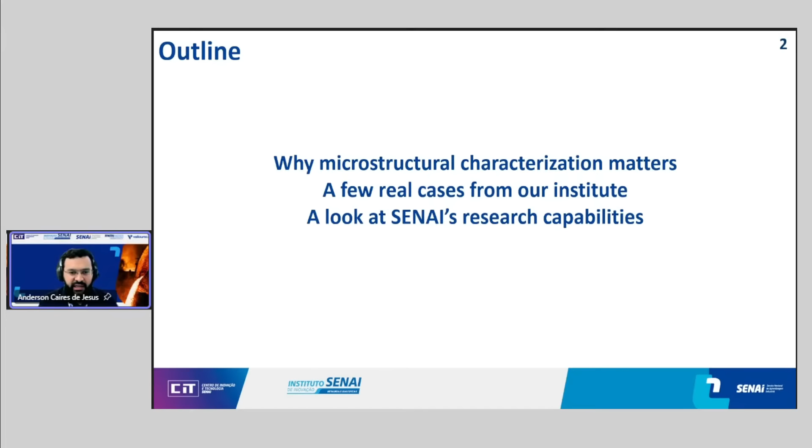In this talk, I will give you a quick roadmap about microstructural characterizations and why they matter for today's steel research. I think we need to understand the phenomena and correlations between microstructures, properties, and performance of metallic materials. I will share a few real cases and examples from our institute, as examples of applied research and how these characterization techniques can be used in real-world industrial challenges. Finally, I'll give you a look at the SENAI Institute of Innovation, Metallurgy, and Special Alloy research capabilities, just to get a sense of the kind of work we do and how we can help with your challenges.

So let's get started. I want to start with the basics. Steel is everywhere, in every aspect of modern human society. Global steel production data for 2024 is around 2 billion tons per year. That is a lot, more than any other material produced on this planet. It's in the buildings we work in, the cars and trains we travel in, the pipelines that carry energy across continents, in our homes, and the tools in our laboratories.

I think we need to understand what happens inside these materials at the micro level. This is really important for real-world applications. When you're talking about material produced and used at these magnitudes, every small improvement in how we understand and control the microstructure has a great influence on performance and great economic impact for society. Grain size control, phase distribution, inclusion content, precipitation behavior, all of these things are really important for applications for society.

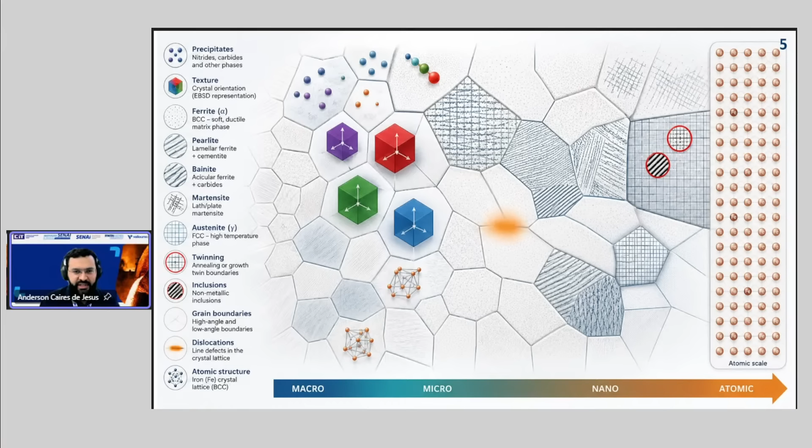It's really small, but the orientation relationships between these precipitates and the matrix have a great impact on mechanical properties. It's so interesting. At the finest, atomic level, we're talking about dislocations, defects in crystallography. It's such beautiful science behind a single piece of metal. So why did I want to show you these pictures today? The reason is actually very simple: steel is a really complex material.

We need a multi-scale picture of steel microstructure, from the micro level to the atomic level, together in a single map. At the macro scale, we look for grain structure and morphology, crystallographic textures, segregation bands, non-metallic inclusions, and deformed regions. We need to study this at the micro level too. Moving to more magnification, we get to the phase distributions: ferrite, pearlite, bainite, martensite, beautiful imaging using SEM, austenite, and the precipitations. All of these tell us about the material's processing history and possibilities for application.

And at the nano scale, variants, subgrains, dislocation cells, twins, deformations, it's a really complex picture. At the nano level we start resolving nanoprecipitates, like I said before. The coherence between precipitates and the matrix is so important, the interface between matrix and precipitates is important, and you need electron diffraction to explore this. These atomic scale features have a lot to say about material applications and possibilities.

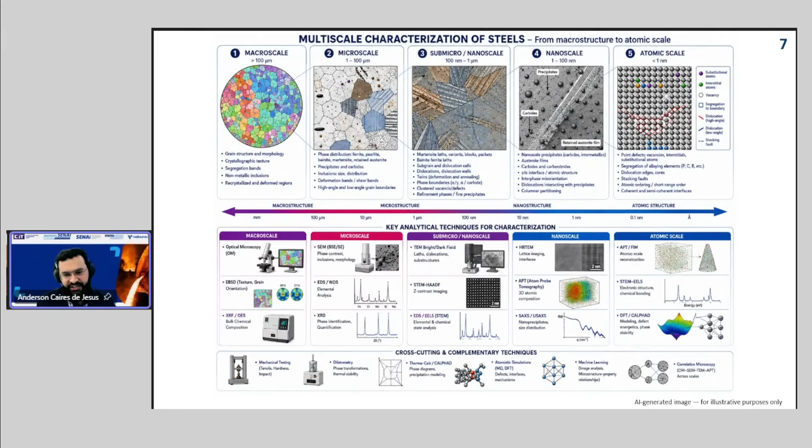These correlative techniques, combining all these methods, give us a full picture of the sample. This technology is used to create new applications or increase performance of materials in industry. Maybe just 0.5% or 1% improvement in material dimensions is so significant, it has economic impact for society.

This is a panorama of materials characterization these days, a lot of techniques. So this is not a talk about the specific technical aspects of each of these analytical techniques, but a more general approach to using these techniques to analyze materials.

Here in our institute, we have been working with our industrial partners and projects to understand the relationships between microstructure, properties of material, and performance. It's really interesting, not just creating new compositions of materials, but understanding the material properties.

First, we have an interesting work together with our colleague Daniel Matsubara for Gerdau Company, one of the largest steel makers in the world, in Brazil. The challenge here was understanding the influence of fine vanadium precipitates on the mechanical properties of steel for structural applications. This is a really interesting example, working in collaboration between the Daniel Matsubara team here at SENAI and Professor Victor Wolff at the Federal University of Minas Gerais, trying to understand why they observed different mechanical properties for these applications.

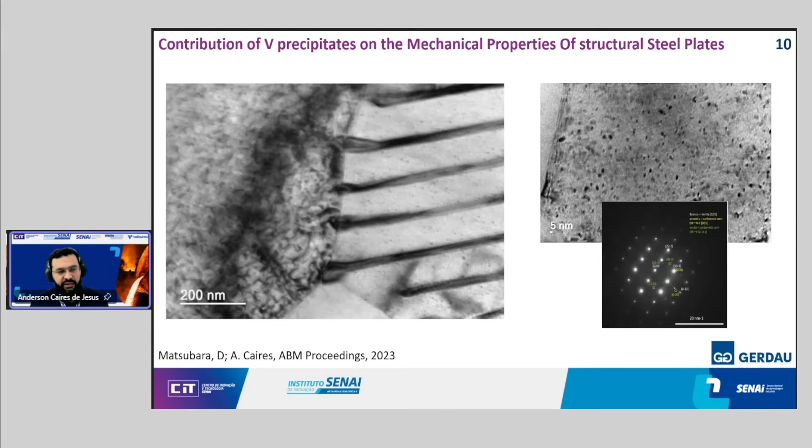The relationship between the matrix and precipitate interface was really important to understanding the differences observed in mechanical properties. We used electron diffraction to confirm these precipitates' interfaces follow the Baker-Nutting orientation relationships. This is just an example of a situation where you need to use more advanced transmission microscopy technology. This is very hard work to prove the orientation relationship between really small precipitates and the metal matrix, and it's really interesting for industrial application.

Another example of microstructural characterization playing a central role was our work with the company Vallourec, with my colleagues Roberto Maranhão, José Roberto, and Vicente Trindade, one of our speakers this morning. In this work, we used the Gleeble Thermomechanical Simulator to reproduce weld thermal cycles and compare the simulated sample against real weld samples. Again, a multi-technique characterization approach using optical and scanning electron microscopy, plus several different techniques for mechanical characterization of materials. Overall, the physical simulations reproduce the microstructures, and comparing to the real-world scenario gives us confidence in our simulations using the Gleeble machine.

And finally, I have a third example of papers and characterization work my team did at SENAI, and another institute here at SENAI working with industry to analyze microstructure. These are two papers presented with my colleague Ricardo Nolasco in 2014 at ICE Steel in China. This is a project between SENAI and CBMM, a company producing niobium here in Minas Gerais - maybe the largest niobium producer in the world - to explore the challenge of microstructural control in seamless pipe production.

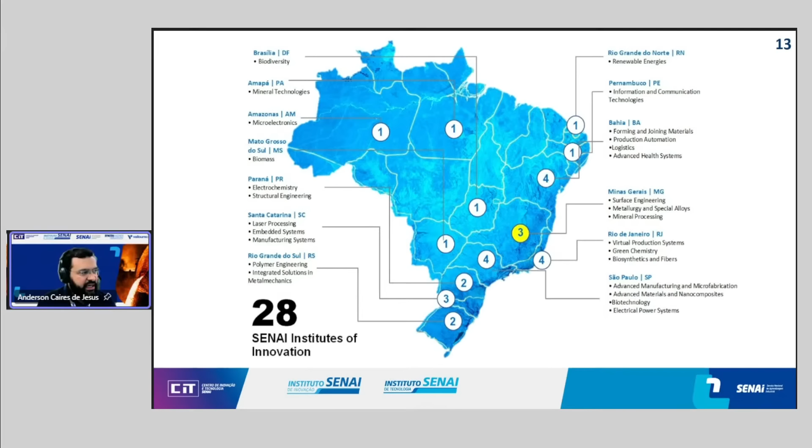But across Brazil, we have a lot of other institutes - advanced manufacturing in São Paulo, for example, and nanocomposites and polymers elsewhere. We have many different areas of expertise distributed across Brazilian territory.

Here at Minas Gerais, we have our Innovation Technology Center - a big campus in the city of Belo Horizonte. We now have two campuses: our campus here in Belo Horizonte and another campus in the city of Lagoa Santa, near here in Minas Gerais, where we explore rare earth technology. Our campus now has 3 institutes of innovation technology for SENAI, with more than 100 employees dedicated to industrial research.

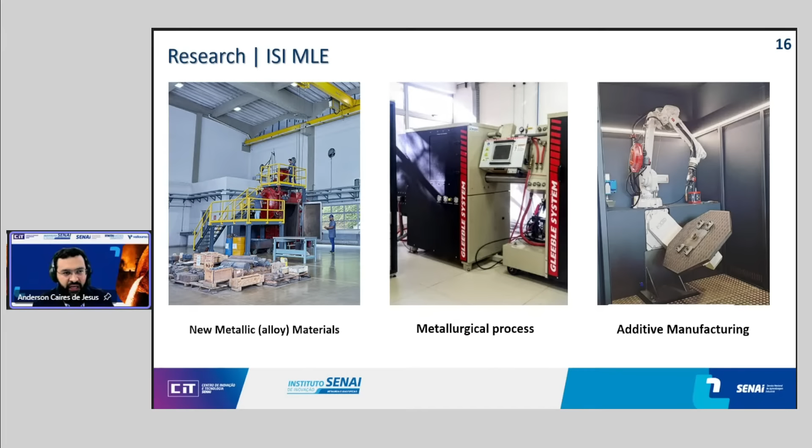This is our core of expertise here at the SENAI Institute of Innovation in Metallurgy and Special Alloys. We have top award-winning research facilities, for example alloy design, where we use computational simulations to understand material properties and design new alloys, both ferrous and non-ferrous alloys.

We have a laboratory for alloy melting and remelting using VIM furnace and remelting using VAR furnace, and here in our campus a pilot plant for 100 kilogram ingots. And of course, we have complete microstructural characterizations.

It's a world-wide metallographic laboratory here, and we also have electron microscopy, scanning and transmission electron microscopy, and a team for metallurgical process and heat treatment, mechanical testing, and so on.

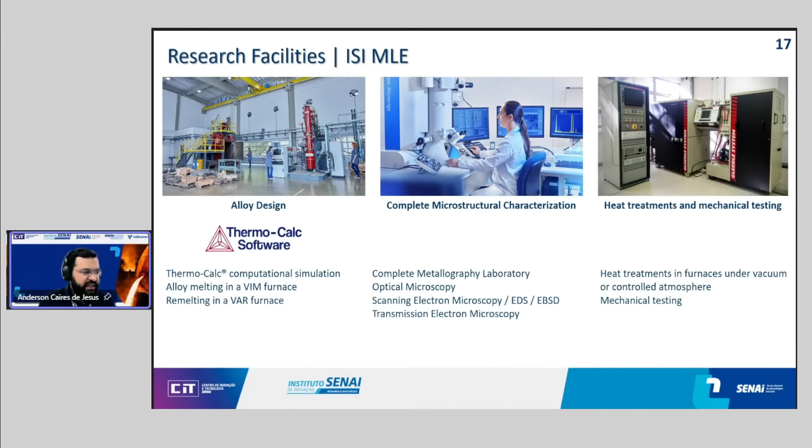The big team here in the city focuses on metallurgy and special alloys. We support industry using R&D grants through several national and international possibilities to help industry with their challenging everyday needs.

In general, I would like to invite everyone to know a little bit more about our institute and our possibilities to help industry with everyday challenges.

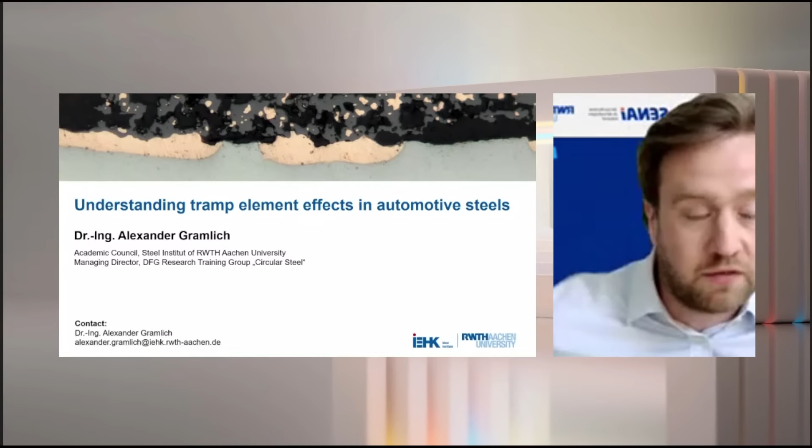As you can see, I have a double affiliation at the moment—I'm also the managing director of a new DFG research training group which we started this year, and I will give you more information on that at the end of my talk. So I will outline what alloying and tramp elements in steels are, their origin, and how they influence, on a schematic level, our metallurgical processes.

And then I'll give you a fundamental research example from our institute where we investigate copper impurities in industrial steels as well as in fundamental alloys to learn more about the precipitation behavior. Finally, I'll give you an overview of case studies, which we did mostly with student theses, where we investigated standard steels like DC01, S355, and also quench and tempering steel. All of these steels were alloyed with additional amounts of tramp elements to simulate future recycling steels, which we will produce more and more here in Europe.

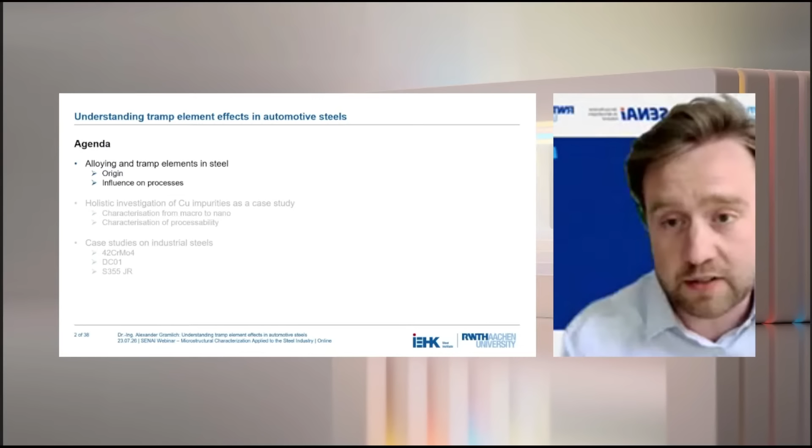So let's start with the first topic, alloying and tramp elements in steels. As you all know, our matrix in steel consists of iron and carbon, but those materials I would call nowadays mostly boring if there's nothing else inside. So we have our alloying elements like chromium, manganese, nickel, silicon, and molybdenum. Every one of these alloying elements is always added with a specific aim in mind to increase strength, ductility, whatsoever. Besides these wanted elements, we also have impurities, either from processing or from raw materials.

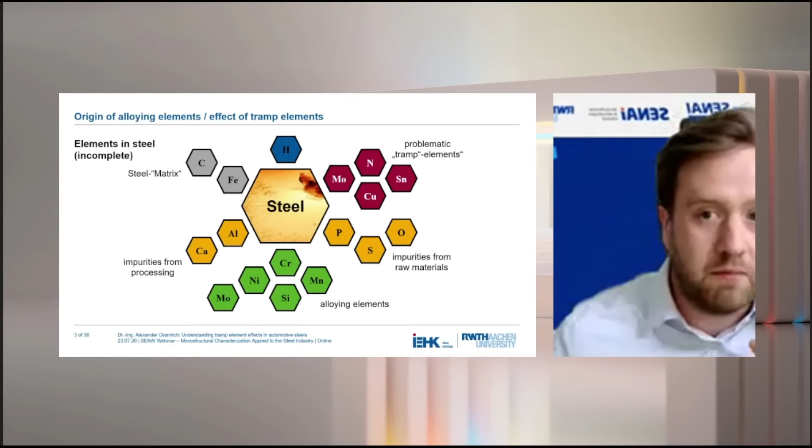Also, we always have a certain amount of hydrogen in our steels, but most problematic are the so-called tramp elements. The group I'm showing here, like copper, molybdenum, and so on, they are more problematic than the impurities from raw materials because it's really difficult to extract them from your liquid melt. So if they are once in your steel cycle, with every recycling step, you will enrich it and get more and more copper, for example. Over time, these copper additions can be really significant and will more or less destroy your steel concept.

What's their origin? When we are talking about primary steel production, we have calcium, aluminium, phosphor, and sulfur, which come from raw materials, for example. They can be removed relatively easily by metallurgical approaches. When we are then going to future steel production, for example mixing DRI with a lot of scrap in an electric arc furnace, we will introduce tramp elements like copper or molybdenum, which are enriched in post-consumer scrap in our melt, and they cannot be removed very easily.

There are some methods to extract, for example, copper. Vacuum distillation can remove a lot of the copper from the melt. However, all of these technologies which are available to reduce these tramp elements are very expensive, and you basically lose your business case for steel production if you would use this for standard steels for construction, for example.

Additionally, we are talking also about nitrogen nowadays in Europe, because a lot of steel concepts, especially for automotive industry, like bake hardening steels or interstitial free steels, are very dependent on having high cleanliness and also low interstitials. When we are now moving from a blast furnace-based steel production to an electric arc furnace-based steel production, these nitrogen levels are also increased and processes need to be adjusted more or less.

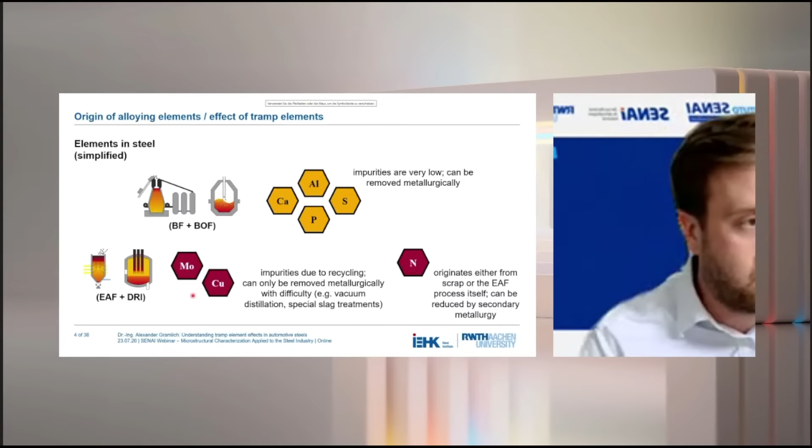When we are now thinking, okay, we have different steels, or similar steels, but with different concentrations of tramp elements on a schematic level, what would that change? We can summarize that copper, tin, nickel, chromium, molybdenum, and sulfur all reduce hot formability and cold formability, and would increase strength slightly, mostly via solid solution hardening, while toughness would be reduced. They originate from different scraps which are introduced into the general steel scrap.

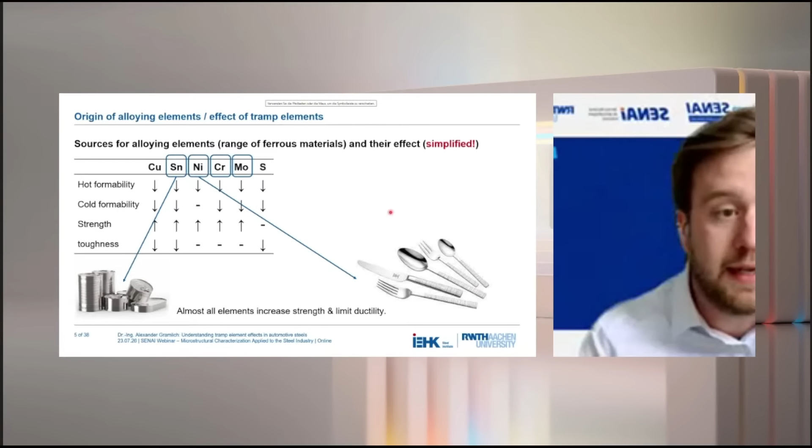I gave some examples here, as you can see, especially when we are talking about bearings or high alloy tool steels, it becomes pretty clear why we're also having chromium and molybdenum in our steel scrap. So in summary, most of these tramp elements will, to some extent, increase the strength and limit the ductility. With this, we could work to some extent. However, this is not everything which is covered by the tramp elements, and we will, especially in the case of copper, see the biggest problem in the upcoming minutes.

I already showed you an overview of the alloying elements in steels. I gave a small note at the top that this was, of course, incomplete, but I want to also give you another example, which is a bit less incomplete, because we also have microalloying elements: titanium, niobium, and vanadium, also nicely introduced by Anderson in the previous talk. What they can do is grain refinement and other very interesting things in more advanced steels. Also, boron is alloyed, for example, in press hardening steels for automotive. All of these alloying elements are very dependent on the nitrogen concentration because they have a high affinity to nitrogen.

And when we are moving in Europe to electric arc furnace-based steel production, all of the alloying concepts which are currently produced by the blast furnace, they need to be reassessed if they can be moved to the electric arc furnace. Okay, so far, a small introduction to the tramp elements in general, where they come from.

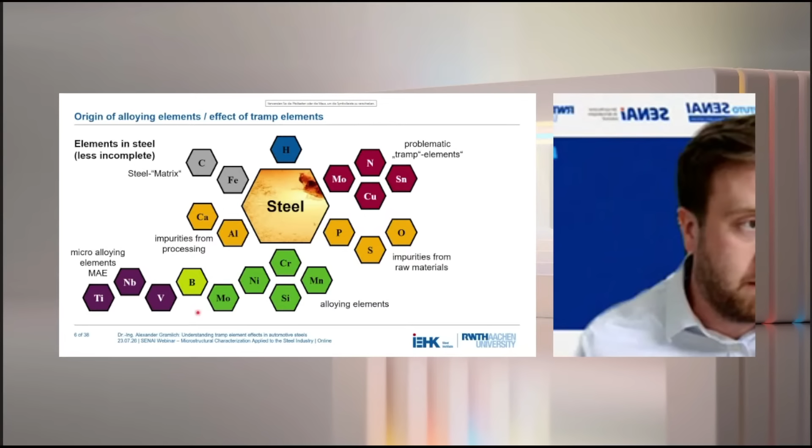And this is independent if it's a phase which is forming like austenite or ferrite or a precipitate. What is most important, and I will give you some examples later, is that all the impurities we just discussed interact basically with these phase transformation kinetics. This is what we need to consider, because these are the effects which go beyond only increasing strength or ductility.

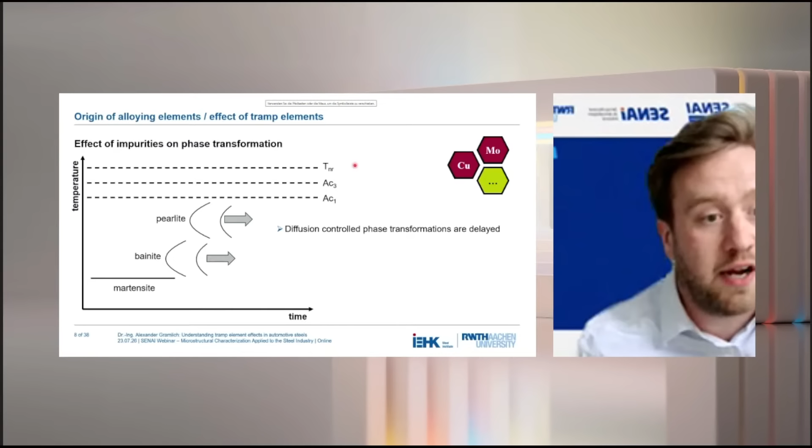So for example, our tramp elements, they will move the pearlite and the bainite field to the right, as all of these diffusion controlled phase transformations are usually delayed. We will have, in most cases, a reduction of the martensite start temperature, and also our temperature for no recrystallization is increased. And finally, AC1 and AC3 change in dependency of the tramp elements.

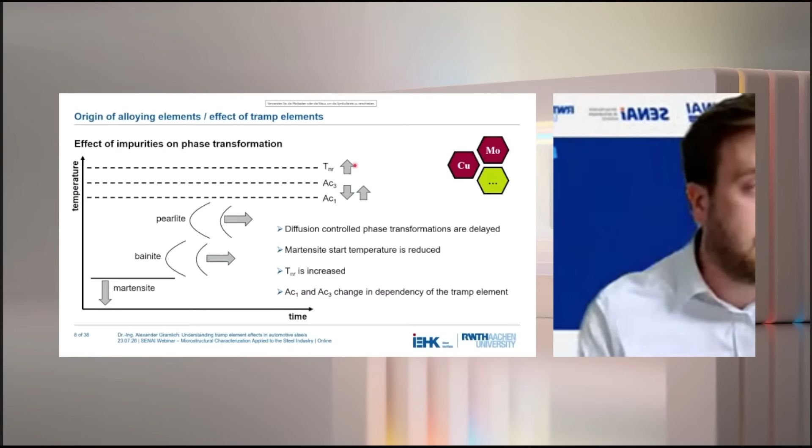Why is this important? Because these diagrams are used to design every heat treatment process in the industry. And when we are looking now, based on these changes, for example, on a typical quench and tempering process, here also schematically shown, we have influences on the austenitization temperature as A1, A3 are modified.

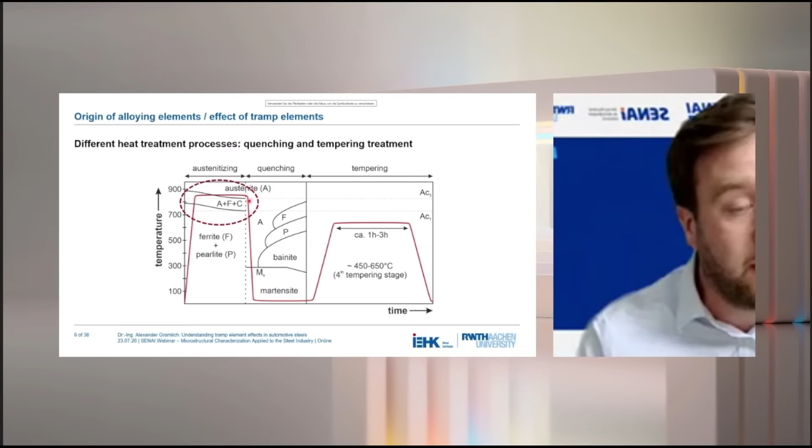We will have an influence on how fast we have to quench to achieve fully martensitic microstructure, because all of these phase fields are modified by the tramp elements. And finally, we will also see an effect on the results we get after tempering, as carbide growth, for example, is also influenced by tramp elements.

This is for classic quench and tempering steels, maybe a forging product, but also when we are talking about thermomechanical rolled products, we have to assess the effect of tramp elements. I already said that we will have an effect on the no recrystallization temperature, on the AR3 and AR1 temperature, and also our microalloying concept needs to be assessed, as we might have an interaction with nitrogen here.

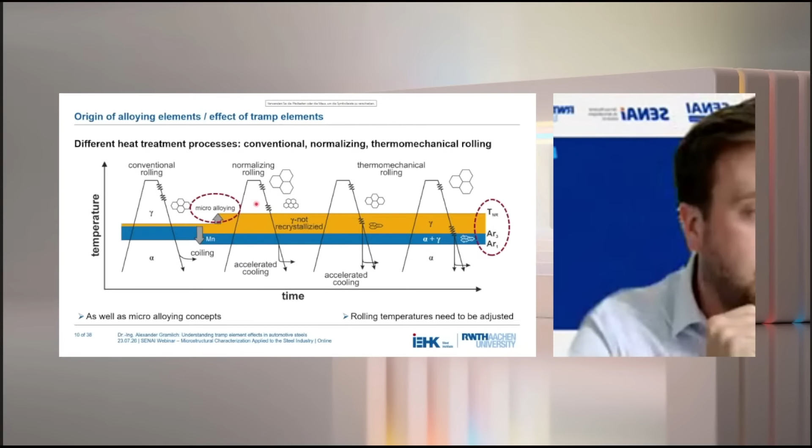So basically, if your company is doing hot rolling, different types of it, normalized rolling, thermomechanical rolling, whatsoever, if tramp element concentrations are growing, this needs to be considered and investigated, and how your processes need to be adjusted.

From this fundamental basis, I would now like to dive deeply into one topic, which is the effect of copper. And this is maybe the most prominent example, of course. It has been researched in the past quite extensively, but it gets more and more important because due to the electrification of the transport sector, more and more copper is entering the scrap cycle.

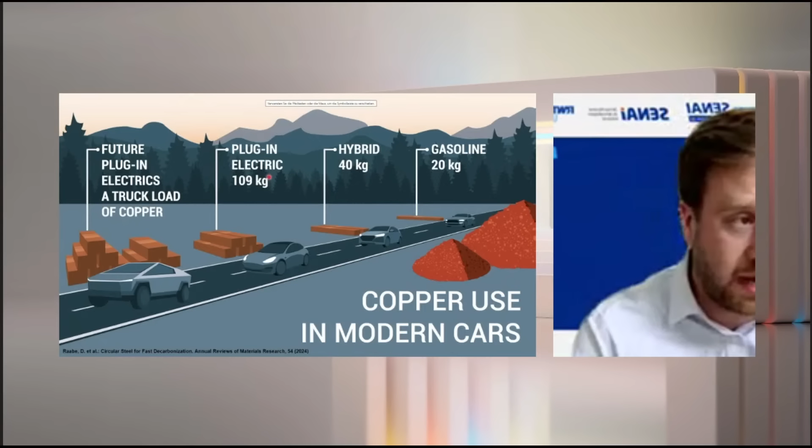So if you're looking on a standard gasoline car in the past, it had maybe around 20 kilograms of copper. When you now have a modern plug-in electric, it can have over 100 kilograms of copper. And just to give you an idea where all the copper sits, it's not only the motor for moving the car forward, also every quality of living improvement, for example electric windows, they all contain small motors which contain copper. So all of this adds up in the end to a lot of copper which is introduced into our steel material flow.

So we have to deal with it and also investigate what the copper is doing in the first place. As a material engineer, I really like copper because you can do a lot with it. You can improve strength, toughness, hardness. It influences transformation behavior. You get oxidation resistance and corrosion resistance, dependent on the concentration. And most interestingly, there are a lot of studies in China: if you introduce quite an extensive amount of copper, you can even get antibacterial properties.

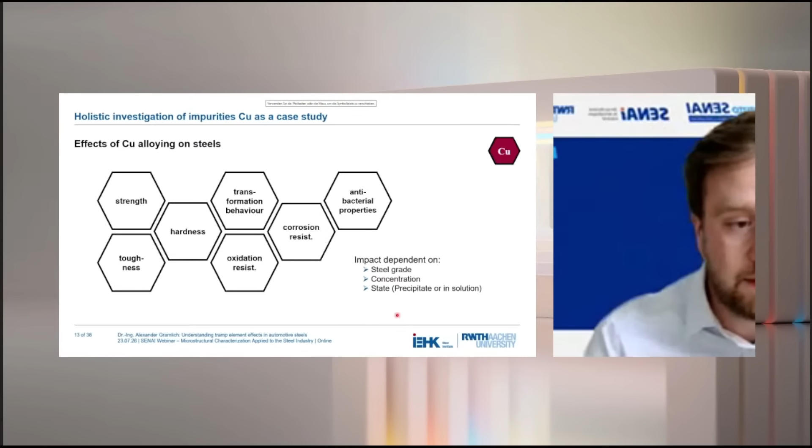So from this overview, you could say maybe copper introduced into the steel is not a bad thing. However, there's a big problem, which I will explain later on. Always, the impact is dependent on the steel grade—which steel we are alloying with copper, the concentration of copper, and also the state.

As I already said, quite an extensive amount of research has been done in the past, and this is the current opinion in the literature of how the precipitation process goes on. You start with a very high amount of iron still in your copper precipitate, with a coherent BCC precipitate, which over time develops through two semi-coherent intermediate states into the FCC thermodynamically stable incoherent copper precipitate. As indicated by the crystallographic strain, the FCC one has basically not much influence, and the BCC one is the most interesting one from a mechanical engineering perspective.

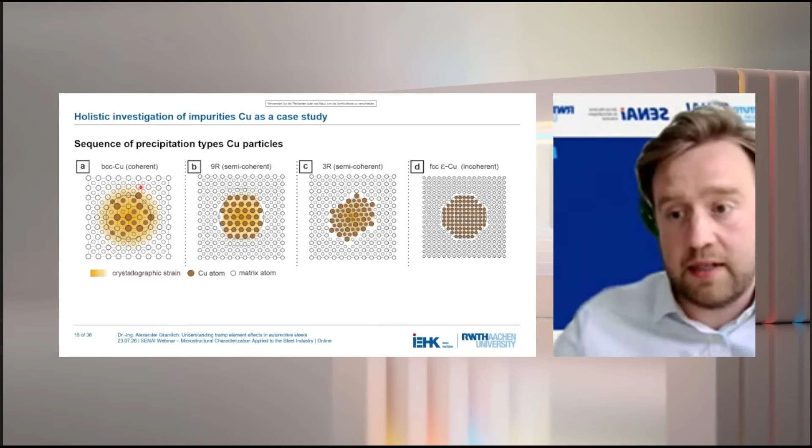This is only schematic, but as Anderson also nicely pointed out, we nowadays have possibilities to investigate copper at atomic resolution, and this is what we did in the past. Here you can see an atom probe tomography result. Basically, all these small orange dots are single copper atoms, and with these larger orange balls, we try to visualize copper precipitates.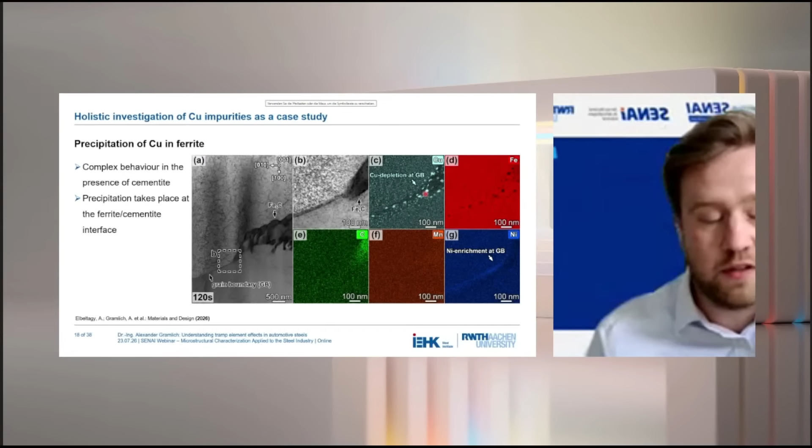So you could argue, how do these precipitates really form? Basically, you can only learn this from in situ observation, and this is what we are working on at the moment. For this, we went to a synchrotron source for X-rays, and did dilatometric investigations of our copper alloyed steels, measuring the crystallography in situ.

With these results, we could prove that in ferritic steels, you also have, in some cases, direct precipitation of this FCC copper. So we are somewhat challenging what is currently the state of the art. But this is very important, as all of our modeling approaches need this data to come up with predictions of how the copper precipitates are growing in your industrial steels.

Finally, we could also demonstrate this again with atom probe tomography. We did an investigation after 120 seconds ex situ and after 30000 seconds. What you can nicely see is that you have a coarsening of the precipitates depending on your heat treatment time.

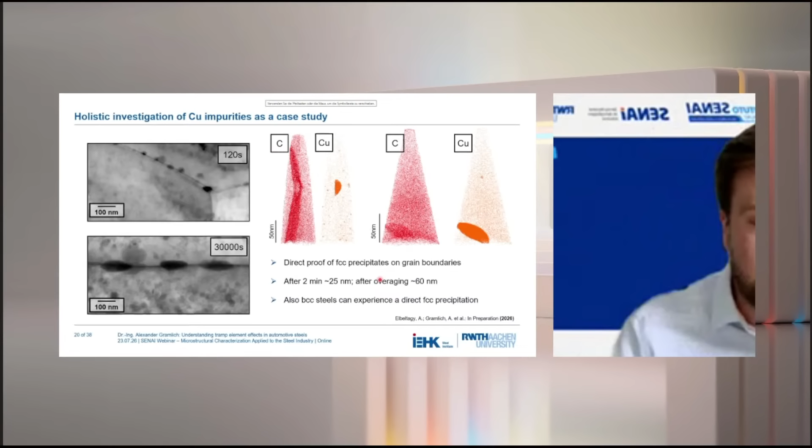From this we learn there are a lot of precipitates. It's a bit tricky to model them, it's a bit tricky to measure them. However, we can use them for strengthening.

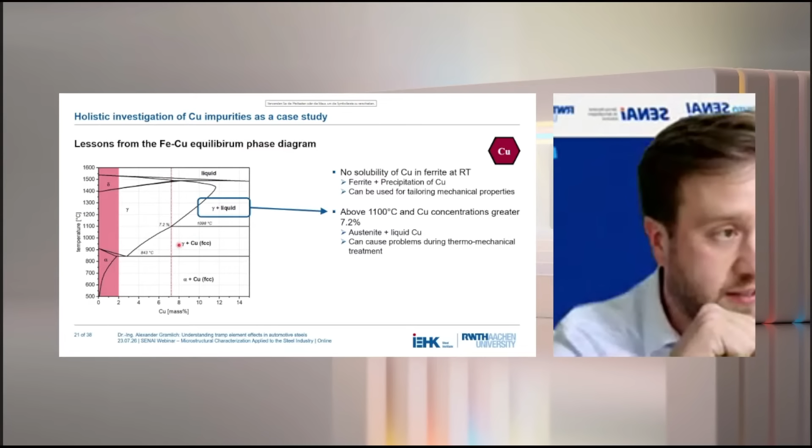However, you might ask, okay, this happens only if you are above 7.2%. Why is this an issue? How will the copper not concentrate up in the steel scrap? This is true on the one hand. However, this is not simply a problem of soluted copper in the matrix. The reason is that copper-induced hot shortness, the hot fracture of steel slabs, is a combined process of liquid metal embrittlement and selective oxidation.

You start with an initial state where your copper is homogeneously distributed throughout the matrix. Then your scale layer will form, your oxide, and your copper is not soluble in the oxide. So your copper will enrich between the oxide and the matrix to such an extent that it will form more or less pure metallic copper. And when you then put stress on it, basically your copper can penetrate the grain boundaries very easily.

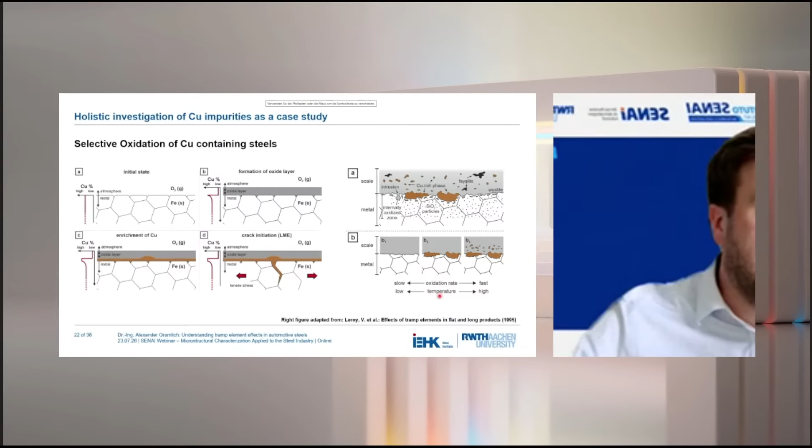This can be influenced, of course, either by working with other scale-influencing elements like silicon, for example, or by working on process parameters like the oxidation rate or the temperature. By this you can push the copper a bit into the scale layer. However, it's still an issue which is not completely understood. Some ways exist for working around it, but these ways are often defined only for a single steel, and the mechanism behind it is still under investigation.

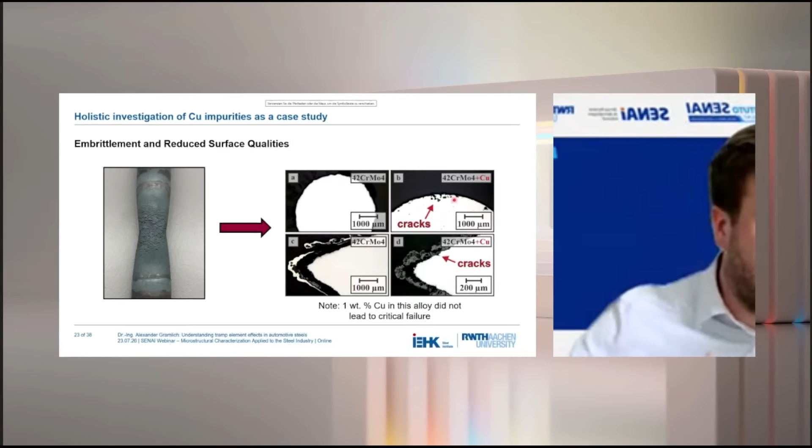Just to give you an example how this would look: in a steel sample, we did an interrupted hot tensile test, and here you can see nicely how basically the full surface of the sample is covered with deep cracks. And when you look at microstructure images from the side, you can see that we have penetration of these cracks into the steel sample.

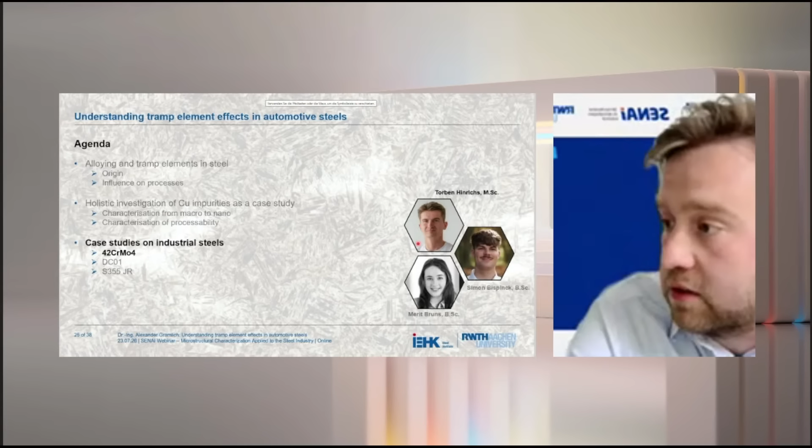Okay, so far to the more fundamental investigations. Now I would like to continue with some case studies on industrial steels, starting with the master thesis of one of my students, Mr. Hinrichs. He investigated the 42CrMo4 quench and tempering steel.

Similar to what the colleagues at SENAI are doing, we usually produce our own lab melts up to 80 kilograms. In this case, we varied the copper concentration and added 0.5% and 1% to it. We investigated phase transformation behavior, mechanical properties, and also the hot shortness susceptibility, but I will focus here mostly on the phase transformation behavior and the mechanical properties.

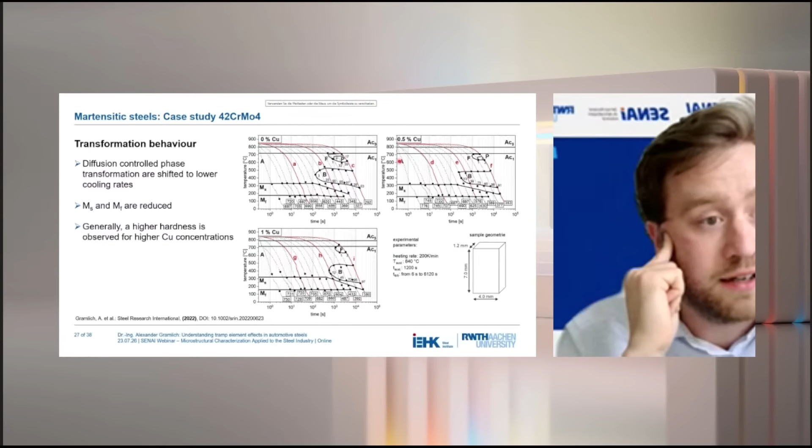For this we collected standard CCT diagrams. As you can see in this slide, we have the reference state and then the CCT diagrams for 0.5% and 1% copper. As you can see quite directly, but I'm adding a line here to make it even more visible, all of our diffusion-controlled phase transformations are moved to the right side. So bainite formation is now taking place at slower cooling rates, the same as ferrite, and we couldn't even find any pearlite formation anymore. So we see here that hardenability is increased through the 1% copper.

Additionally, we see that martensite start and martensite finish are reduced, and generally we see a higher hardness for higher copper concentrations.

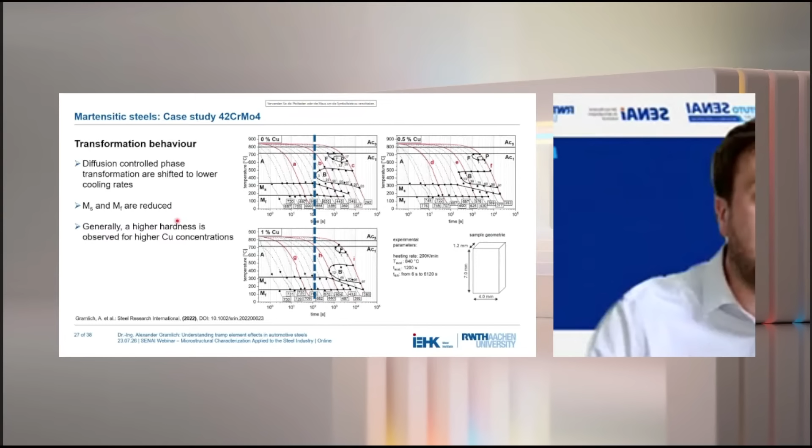However, for forging steels, this is not a bad thing, because when we increase the hardenability, theoretically we could also produce components with larger wall thicknesses from this steel and have a complete martensitic microstructure into the core, which might not have been possible without the copper. So in my opinion, this would be a positive effect.

When we are investigating the mechanical properties, we can see here in the full line the reference alloy, and in the dotted line the one with 1% copper. We have differences independent of the tempering temperature, however not critical. In general we always have the classic trade-off: higher hardness, lower ductility. Also the general tensile test curves are quite similar, and the same can more or less be said for Charpy tests.

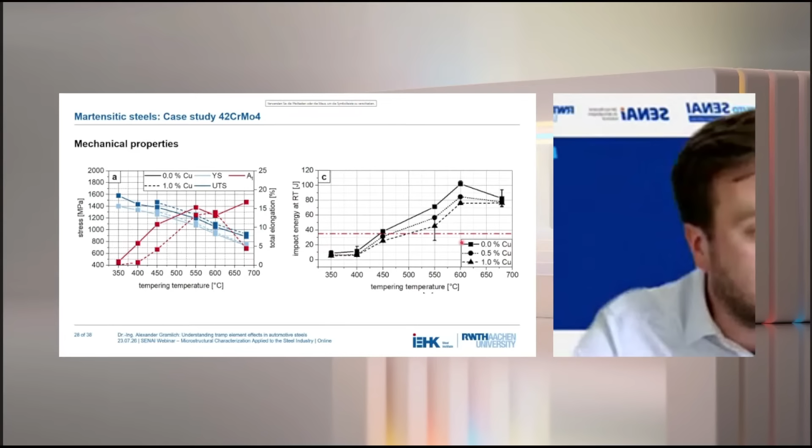We can see a general reduction in this case for the copper-alloyed one. However, we are still for most tempering temperatures above the industrial threshold, which was defined at 35 joules by our industrial partners. So from these results, I would conclude that even 1% of copper can be tolerated in a 42CrMo4 quench and tempering steel.

The last finding, and this connects really well back to the atom probe tomography, is the matrix increase which we found in hardness at a certain tempering temperature. As you can see here in blue, our copper-containing steel has around 70 Vickers higher hardness. However, this cannot be explained by solid solution hardening alone, as the solid solution hardening of copper is more or less around 10 to 20 Vickers in this concentration.

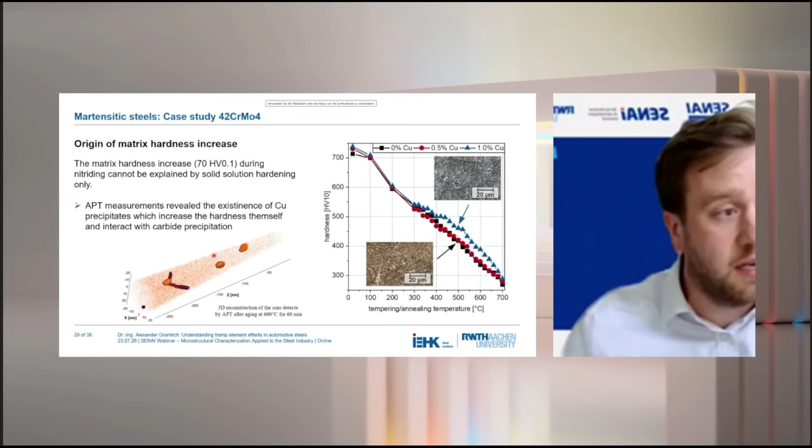But what we found when we looked into APT again is that the copper, here again in orange, connects up with cementite and other carbides. So the effect of copper is not only that it adds solid solution hardening, but it also interacts with the cementite and other carbides, and helps keep them smaller, which effectively increases the hardness more than solid solution hardening alone would. So you see a lot of interactions which have to be assessed, combined, to get the full picture.

Continuing now with ferritic steels. First we looked at the martensitic ones, and now we are looking into two bachelor theses where we investigated industrial-produced DC01 and S355. They were both produced by blast furnaces at the Salzgitter plant in Germany and artificially alloyed with tramp elements to mimic higher recycling fractions.

I will start with the tensile test of the S355. We had three different alloys: two variants of S355 with slightly different carbon and manganese concentrations, and our green steel somewhere in the middle. What I want to point out is not really strength and ductility, because this changes with the carbon and manganese concentrations, but what you can see is that we have a pronounced yielding in this steel. This is connected to higher nitrogen concentrations, which I pointed out at the beginning of the talk.

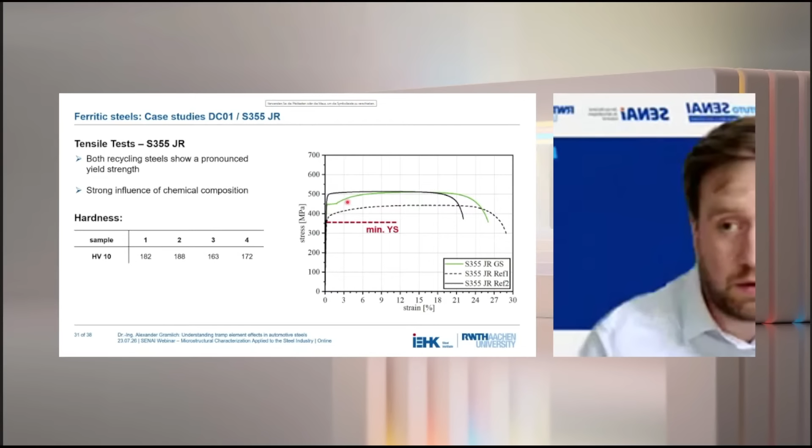Similar things were found for the DC01 and DD11 variants, the hot rolled and cold rolled states. Also here we could find pronounced yielding in the green steel, so this needs to be considered. Maybe not the properties themselves will be affected, but the deformation behavior on a more abstract level.

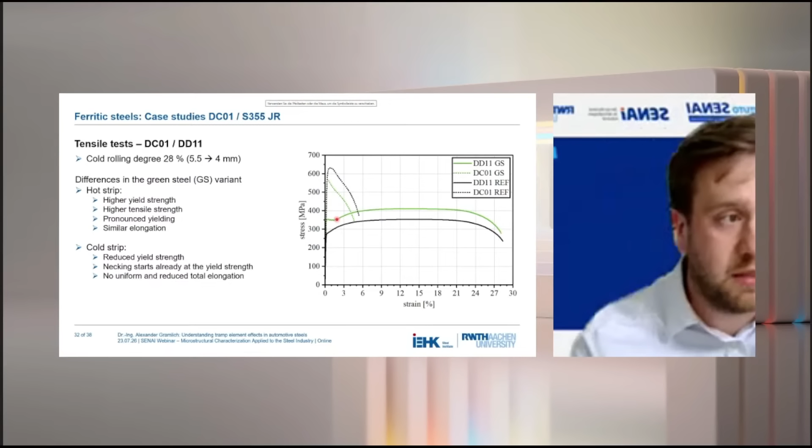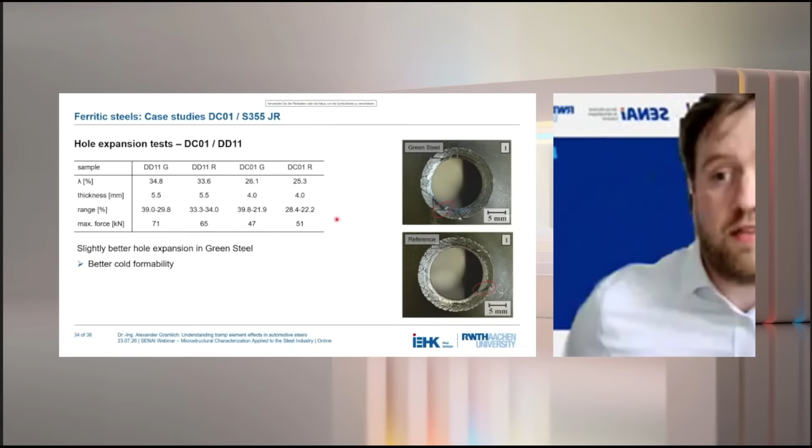However, when we looked at the deep drawing steel, we could see that here our hole expansion ratio was increased, even with the higher strength and the introduced tramp elements. The reason for this was connected basically to the microstructure.

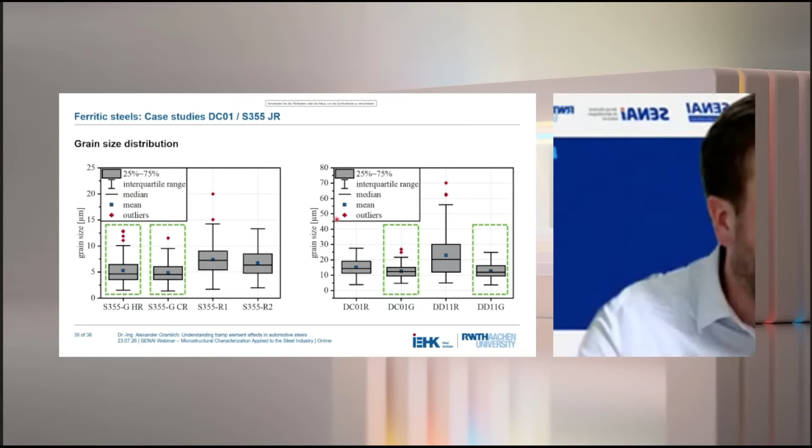We did a thorough investigation of the grain size distribution, and what we found for both steels is that the green steel variants had a much smaller grain size due to the solute drag effect of the tramp elements, which prevents the coarsening of the ferrite during batch annealing. This also fits very nicely back to the beginning of the talk.

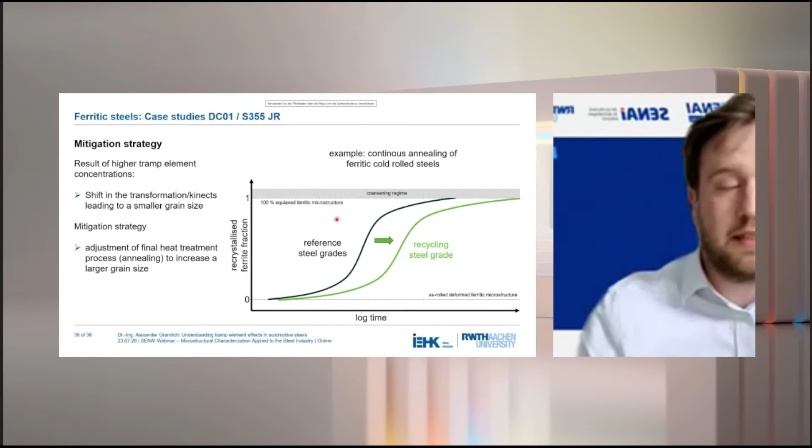Here you are seeing a more schematized drawing of the recrystallized ferrite fraction in our steel grades, and what is basically happening when we add tramp elements. So when we are looking at recycling steel grades, this recrystallization is shifted to longer times, and this can be assessed, and we can work against this by adapting process parameters, for example.

So to summarize basically on the case studies, in most cases, we can say that by adjusting the process parameters, for example heat treatments or rolling parameters, we can really work on adjusting our steel properties to achieve more or less the same as before. Of course, there are some major issues like hot shortness, but these can also be assessed, and we are pretty sure that we can adjust our steel products in the future to move toward a more sustainable and circular economy oriented steel production.

With this, I'm at the end of my talk. Thank you very much for the attention, and I'm looking forward to questions at the end.

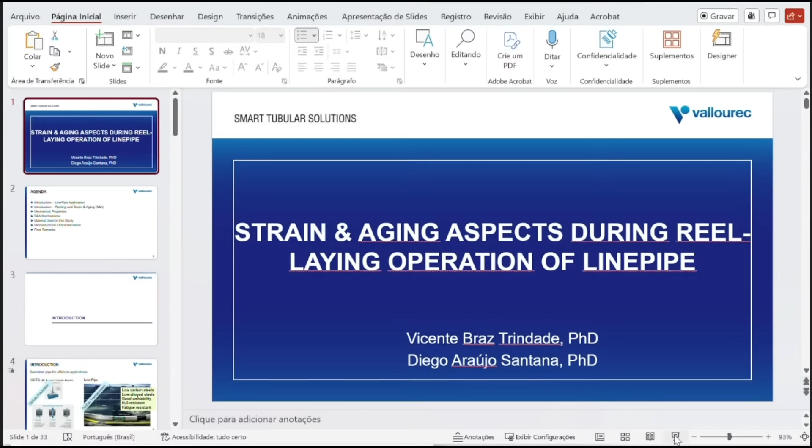Okay. So thank you very much. Hello, everyone. So first of all, I would like to thank SENAI, on behalf of Anderson and Denise, for the invitation today. And of course, I would like to thank my colleague, Diego Araújo Santana, who really conducted this study over these last months. I want to say that Vallourec really appreciates the high level of technological and scientific long-lasting partnership with SENAI, which is very close to our plant in Brazil.

So my talk today will be about strain and age aspects in the reel-lay operation of Linepipe. I'm going to talk about steel application in the oil and gas industry. The agenda of this talk will be a brief introduction about Linepipe application, about reel-lay and strain age process, and then we come to mechanical properties, strain and age mechanism, and the material we are going to show you in this case, microstructural characterization, and the final remarks.

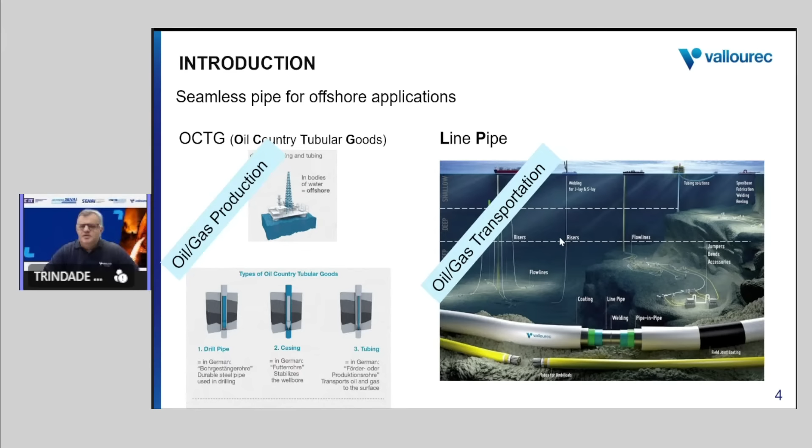These pipes we call line pipe steels, and in most cases they are applied in harsh environments. Usually these kinds of steel are low carbon steels because it's mandatory to have very good weldability. They are low alloy steels. They have to have high strength and excellent toughness, and they are submitted to H2S environments - they have to be resistant to H2S environments and also have fatigue resistance. So today I'm going to show you one example of this class of material, line pipe. I'm not going to talk about the behavior of OCTG, but line pipe material.

So one aspect of line pipe material is that when we talk about offshore application, we need to deploy this steel, the pipeline. And there are basically 3 technological methods to do that.

The first two are so-called S-lay or J-lay. This means single pipe lengths, usually 12-meter pipes, are transported by vessel to the offshore place. There, offshore, those pipes are welded to each other, girth weld, and then the pipeline is laid in the ocean.

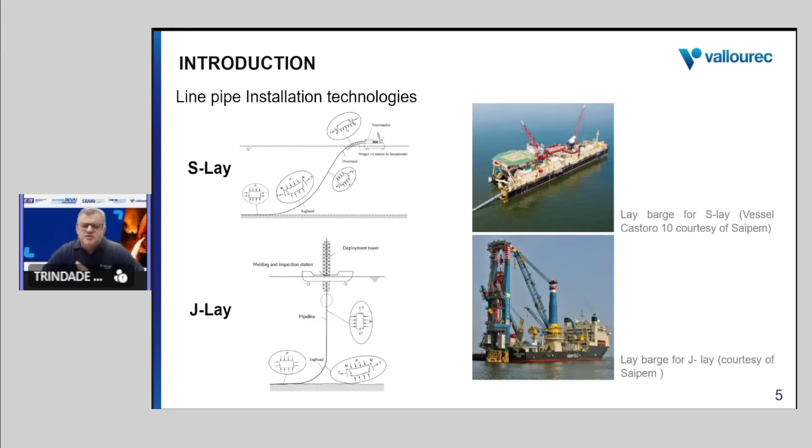The other important one is the reel-lay process. In this technology, the pipes are welded onshore, inland. We do a long rack of pipeline, and those pipelines are connected together and then reeled onto a big reel drum. So the pipe is really reeled, as shown here.

During this process, you can see here in the real photo the reel drum, and the pipe is reeled in this equipment. So you can imagine the severe plastic deformation suffered by these steel pipes.

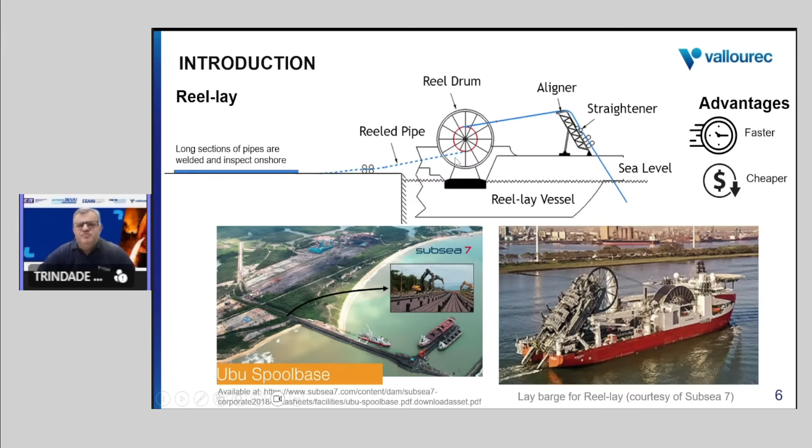This vessel is then transported offshore, and the process needs to unreel the pipeline, so the pipe goes through different conditions of plastic deformation. This is a very interesting process because it's very fast compared to the previous one, and it's cheaper, but it requires high performance steel, because it suffers severe plastic deformation during reeling and unreeling.

So now the question is: when you lay the pipe in the sea, those pipes will have some remaining plastic deformation, and with time, do you have an aging effect? What happens to the properties of this material during the life cycle of this pipe, which is around 20 years? During those 20 years, what happens to this pipe that was laid with some remaining plastic deformation?

So the industry has a way to evaluate this before laying. We actually have two methods to evaluate it. One is to use what we call a small-scale reeling test. I'll show you next how we can simulate this in the lab, and also full-scale reeling.

From material science, we expect that seamless pipes are produced hot-rolled and followed by heat treatment, which is quenched and tempered. If those pipes have these properties, when we have some straining of the pipe, some remaining plastic deformation, we probably get work hardening and aging hardening.

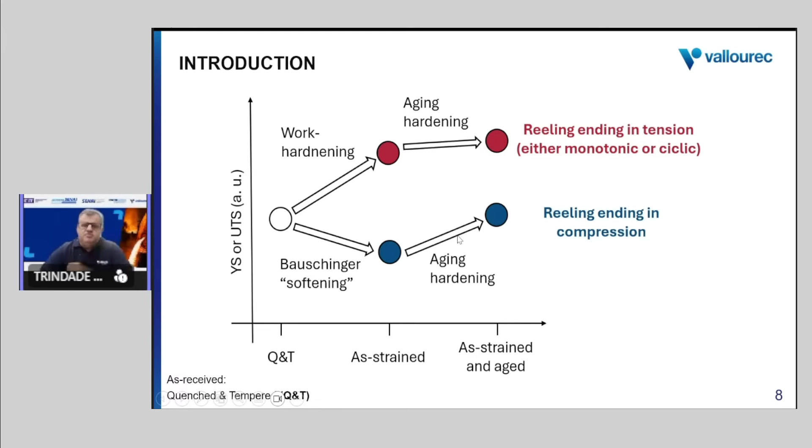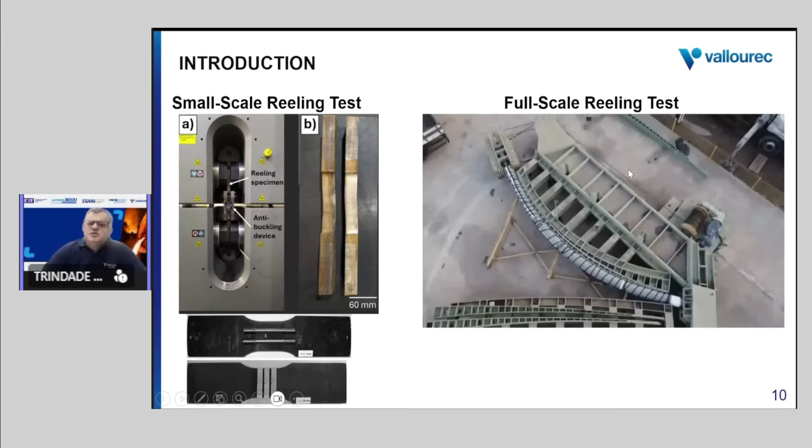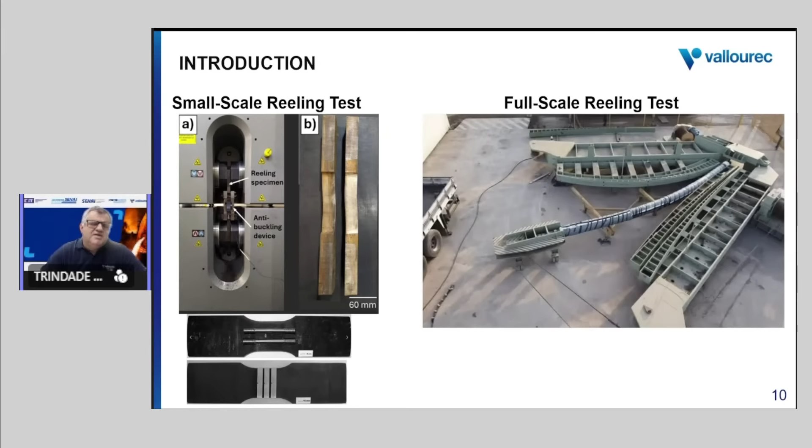Another way is to use small-scale reeling. Small-scale reeling is much simpler to do, because we just take a specimen like this - a tensile testing specimen - and then use a laboratory machine to apply the compression and tension cycles as we want.

So we can simulate it in the lab, using full scale, full pipe, or a lab tensile test machine, with different cycles of compression and tension. When doing this kind of reeling, we introduce plastic deformation and interrupt the tensile test, then if we continue with the tensile test, the behavior will be like that.

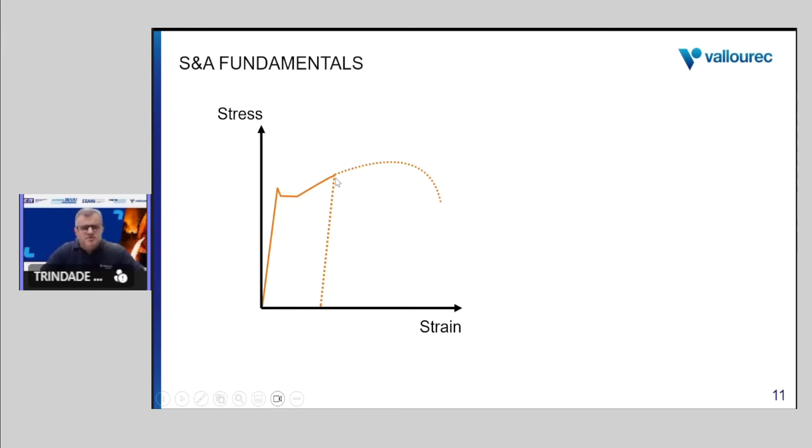Let's take a quench temper material. This will be the behavior of a quench temper low carbon steel. If we interrupt the test here, the material has some remaining plastic deformation. If we submit it to aging, what we observe is the curve now looks like this.

We have an increase in strength. In this increase, there's an increase due to work hardening, introduced by the dislocation density, plus a delta attributed to the aging effect. This is what we're going to discuss in more detail: the contribution of work hardening and the contribution of aging. So to summarize, the total strength, in this case the YS of the final material, is a contribution of work hardening plus aging.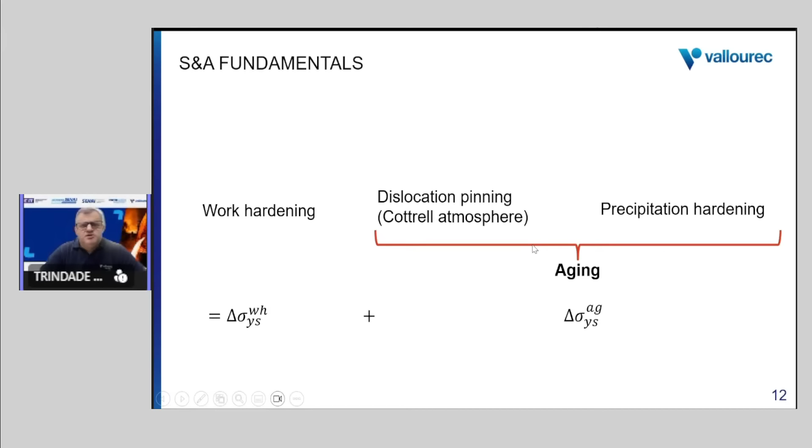When looking at the aging contribution, we can imagine two contributions: one due to dislocation pinning, formation of the Cottrell atmosphere - we'll discuss this a little - and precipitation hardening. We'll come back to this mechanism to see which one is more important in this aspect.

Here's an idea that material properties are really affected by the reeling process. You can see in this diagram the effect on hardness, here is the Vickers, HV10. Here is the as-received material, as heat-treated, quench and temper material at this hardness level. A, B, C, D, E represent different kinds of reeling cycles.

It's a combination of compression and tension, different cycles. From A to E, we increase the final plastic deformation and the tension. We can clearly see the hardness is affected considerably as we increase the final plastic deformation. This happens for hardness and also for strength - YS increasing, UTS as well - and toughness measured by absorbed impact energy. You can see toughness decreases considerably when we go to aging of these materials.

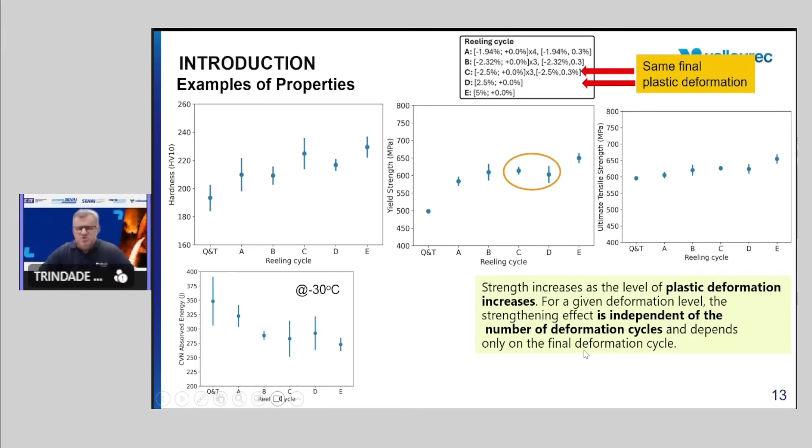That means if you want to simulate the cycle of the reel drum in routine testing, whether you do monotonic simulation or cyclic simulation, it seems to be the same behavior. What matters is not the number of cycles, but the final deformation, the plastic deformation that remains in the pipe.

Another very important finding for the industry is that, as I told you, the increase in strength has two contributions, one from work hardening and another from the aging process. When we see the contribution of each individually, the increase in strength from work hardening is much more significant than the increase from aging. In general, we're talking about 70% of the increase due to work hardness, and 30% due to aging.

This is another important thing for the industry. This is fact, this is observation, experimental observation from extensive lab tests. So what are the fundamentals for that?

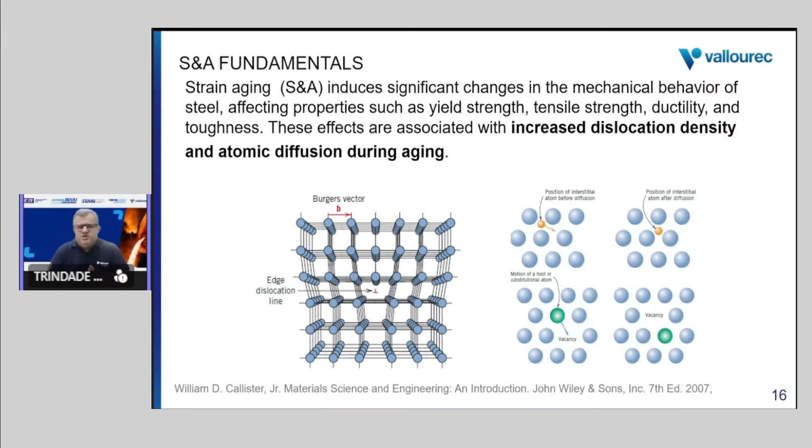We know that when we introduce plastic deformation in steel, we create defects, and one of these defects, very important, is dislocation. You increase the dislocation density of the material, and if you submit this material to aging, we create mobility of atoms, and then you have diffusion, mobility and interchange of vacancies and substitutional atoms. This should happen in the material. So plastic deformation creates dislocations, defects, and during aging, atom mobility should happen.

It's very well known in the literature. All of you know that work hardening is due to the increase of dislocation density. So as we increase the dislocation density, we increase the hardening effect. This is very well known.

And aging, the product standard defined in their specification. For example, if you take DNV specification or API specification, they recommend to evaluate the aging of the material by using a temperature of 250 degrees Celsius for 1 hour. So you have to deform your material in the deformation grade that you want, and then after deformation, you need to submit your material to aging, which is 250 degrees for 1 hour.

If you make some simulation and pay attention to the interstitial atoms in steel, which are more important: carbon and nitrogen, you can see that at 250 degrees for 1 hour, those small elements can really have some mobility in the crystal structure, about 10 micrometer diffusion distance. This is enough to reach the dislocation core and saturate those dislocation cores. So this is one important point.

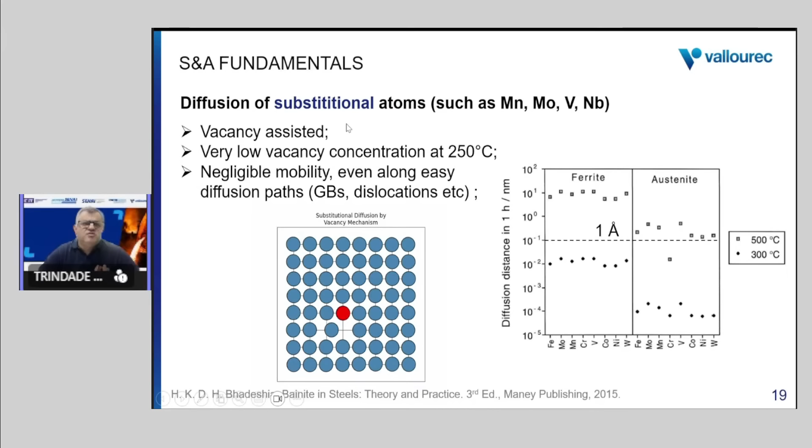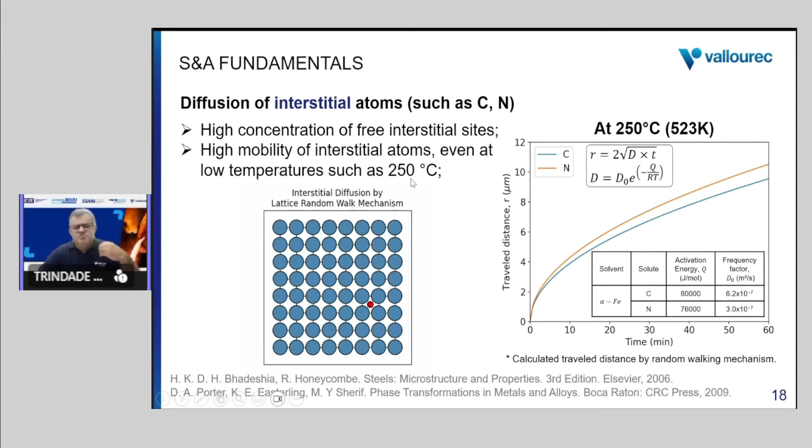So it's nothing. What I want to tell you is that during aging, most probably the substitutional element has absolutely nothing to do with aging, but only the interstitial elements, because they have the ability to reach, to travel, to diffuse up to the dislocation core and saturate it. And this is what comes to the

important phenomenon, which is the Cottrell atmosphere formation. We know that the free interstitial atoms like carbon and nitrogen tend to diffuse to areas, to regions where you have dislocations, trying to lower the strain energy of the system. So those elements will diffuse towards those regions, the dislocation core, and saturate it.

For example, just as an example, we just need 1 ppm of carbon to saturate a dislocation density of this level. So we need a small amount of element to form the Cottrell atmosphere. Once we have this saturation, we have a phenomenon called pinning of dislocations by the Cottrell atmosphere. This is what happens during aging: the Cottrell atmosphere pins the dislocation movement and then increases the material strength.

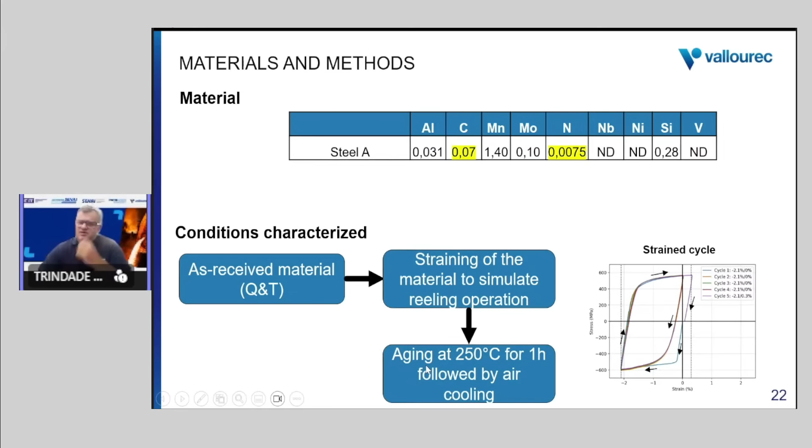So the first finding: we used different techniques to study this material, SEM for example. We could not see any change in the microstructure when we compare all three conditions. The final microstructure after heat treatment of such a low carbon steel is bainite microstructure, and this bainite microstructure remains as-strained and strain-aged. There is no significant change in the microstructure.

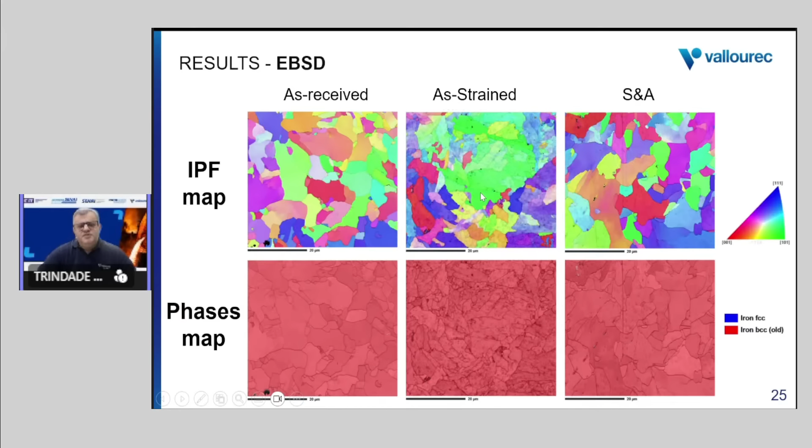If you go even further and use other advanced techniques like EBSD, we can also confirm that there is no change in the grain size of the material, and also no change in the bainite microstructure, as already observed in the simpler SEM microstructure observation. So if we want to go in more detail in the microstructure and observe the micro precipitates, we need to go further with advanced techniques, which here is TEM, transmission electron microscope.

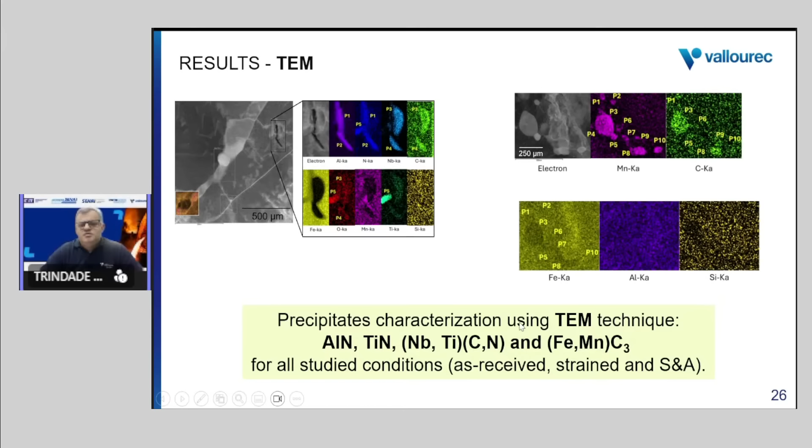In this transmission electron microscope, what we could observe is that independent of the condition—as received, as straining, and strain aging—the precipitates observed are basically the same. There is no change across these three conditions.

So we compare our observations with the thermodynamic calculation. In this case we use ThermoCalc software, and we can see that at this low temperature region where the material is submitted to tempering and aging at 250, the expected thermodynamic precipitates are exactly close to what we observed in the experimental study.

Additionally, you can have cementite here—just as observed, we have observed cementite which is very rich in manganese atoms, a solid solution. Thermodynamics also predicts this high solubility of manganese in the cementite.

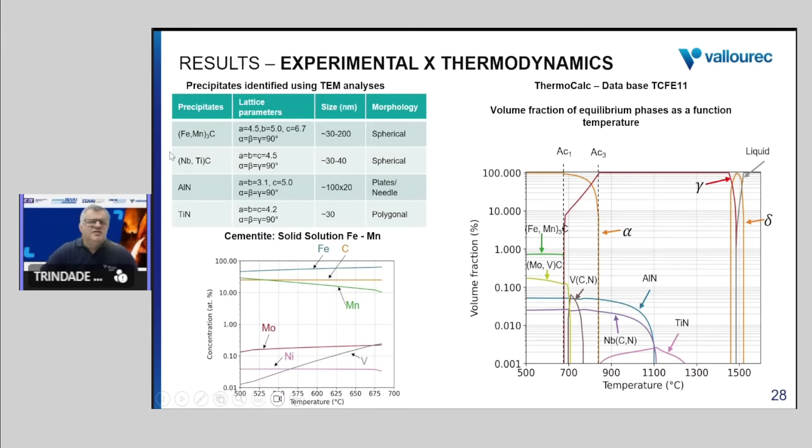Just as curiosity, we also went to a more advanced technique to try to identify smaller precipitates. We use high energy X-ray diffraction. Here in Brazil we have this facility, located in São Paulo state, in the city of Campinas, at the research center called CNPEM, Centro Nacional de Pesquisa em Energia e Materiais. There we used this facility to investigate our material in different conditions: as QT (quench and temper), straining, and after aging.

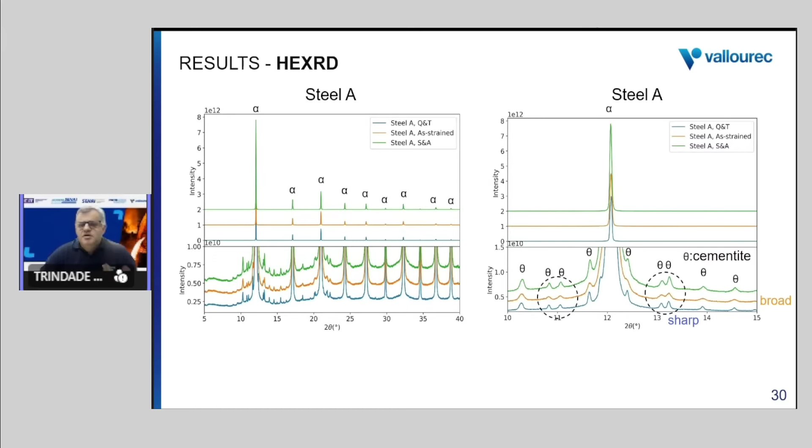What we could observe again is nothing—no big change in precipitation. All the precipitates are basically the same. The only highlight we can mention here is...

When we observe the cementite peak, this blue curve here is for the Q&T condition—you can see this sharp peak. Then after that, this orange curve is the as-strained condition, showing a broader peak as expected, because you introduce some macro deformation. Then after aging, we could see that this peak becomes sharp again.

So this is the only observation we could extract from this technique, plus the observation that there's no change in the macro precipitation. Based on all this theory and our experimental observations, we could conclude that...

Work hardening is, of course, very important. The most important increase in strength after strain and age is due to work hardening, around 70-80%. The other 20-30% is due to aging.

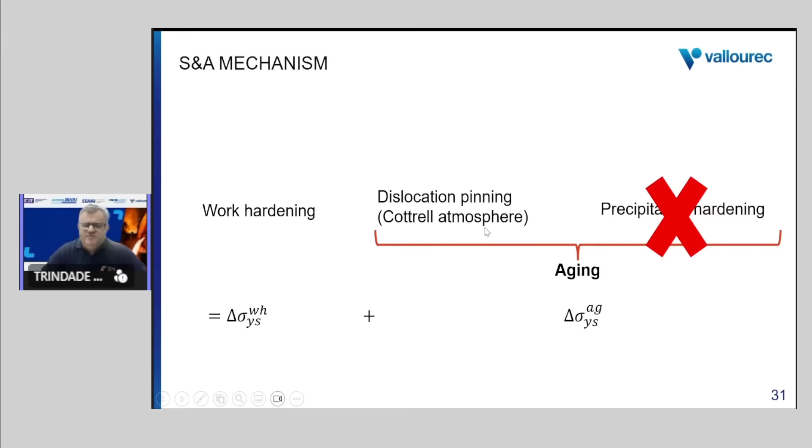Now I come to the conclusion, my final slide. Using advanced characterization techniques including SEM, EBSD, TEM, and high energy X-ray, it was demonstrated that no significant microstructural change occurred between the as-strained and aged conditions.

In particular, no evidence was found for the formation of a substantial amount of fine precipitate that could account for the observed strain aging. This finding indicates that the contribution of aging is most likely associated with the Cottrell-Pinning effect, which is governed by the presence of free interstitial carbon and nitrogen atoms.

Finally, work hardening appears to be the dominant strengthening mechanism in line pipe steel when subjected to the strain and aging process. The change in mechanical behavior is independent of the number of loading cycles and depends solely on the final accumulated plastic strain. I think this is my contribution for the talk today.

The first question is: you showed some images with microscale martensite and other phases identified. Was that identification and assignment done automatically? If so, what method and software were used?

First of all, congratulations to Alexander and Vicente for really nice presentations. I learned a lot in these lectures.

As part of it, phase identification was not automatic. Our phase identification was done manually by analysts, combining morphological criteria and response for each constituent to a specific chemical etching. But nowadays I am studying AI-based approaches for automatic phase segmentation and quantification. Our marketing department is actively looking for academic and industrial partners to create and validate these algorithms for steel microstructures together. But for now we have not been using automatic algorithms for identification.